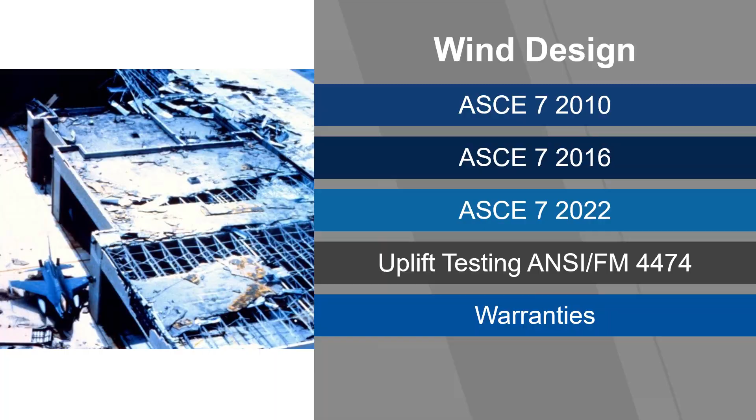Then we're going to take a quick turn and check out the uplift testing to make sure that the assemblies are meeting or exceeding the pressures, and then we'll overlay that with warranties to see how they are dealt with. These are some standard inquiries we get in our office all the time: how does the International Building Code affect warranties, and how do the changes in the ASCE 7 affect roofing installations? Hopefully, through this presentation, you'll have a much better handling of these kinds of problems, and those questions will be answered.

So this is the basic focus that we want to look at: the IBC, which is wind performance, the ASCE 7, which is again wind performance, the FM 4470 and the ANSI FM 4474 testing, which is uplift, and then we're going to look at wind speed warranties, which is wind coverage.

Because again, what we want to do is basically avoid these kinds of problems here, where you've got the membrane just being completely peeled off, or the roof system being damaged.

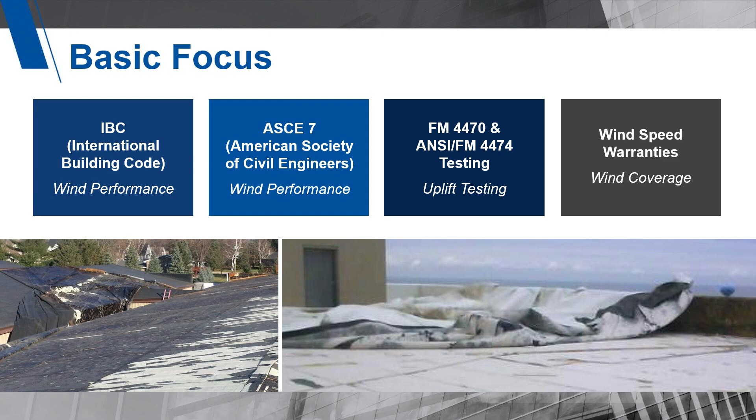Now, the first thing to be able to do the process properly is we need to know which document we're supposed to be using, based upon the state you're in. For instance, South Carolina is using the ASCE 7 edition of 2016, while North Carolina is using the 2010. At this point, no state has adopted the 2022, or is still using the 2005.

But there are 7 states that do it differently. These 7 do it based upon municipalities, local regions, or those kinds of things to decide what code they're using. For instance, in Illinois, they have 3 codes that they actually use: one for the state, one for the schools, and then there's actually the Chicago building code. So each one has their own kind of flavor on how they look at things.

So you need to know exactly what documents you should be using to make sure you come up with the correct pressures. That's one of the first things you need to research. This was actually listed off of the International Code Council website, and it's the latest one that they have for state adoption, January 2023.

Now, within the building code, there's chapter 15, and within chapter 15, they define things like 1504, which references adhered and mechanically fastened systems, and the way we certify those systems is through uplift testing, and then compare that with the pressures of the ASCE 7. I'll get into that in much more detail.

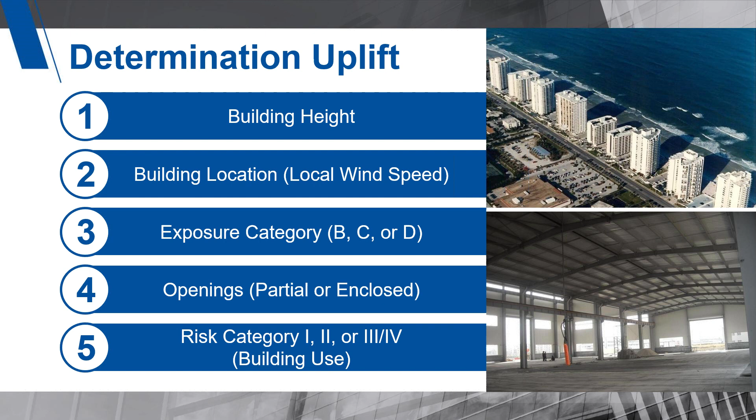And then there's the risk category. This is the step by the ASCE to start to push towards more resiliency in design considerations. So they came up with risk categories 1, 2, 3, and 4. Prior to this, it was just building use importance categories. They've changed that to be more related to what we're dealing with.

Risk categories are defined such that risk category 1 is low risk to human life, examples being an agricultural type building or storage establishment. I like to refer to them as the golf cart shed over on a golf course. It's not a critical structure, so it can be fairly easily replaced and doesn't have a huge category to it.

The most common one we see is risk category 2, used for commercial type buildings. Then risk category 3 and 4 are the ones where we want a good, robust system and design, because those structures store and have kids in them for schools, public buildings, hospitals, power plants. These are buildings we want to make sure can withstand a natural event. They are the infrastructure of our society, so we want to get people to hospitals that are working, so we don't end up having a problem. That's one of the big things people like to focus on, making sure their structures are sound.

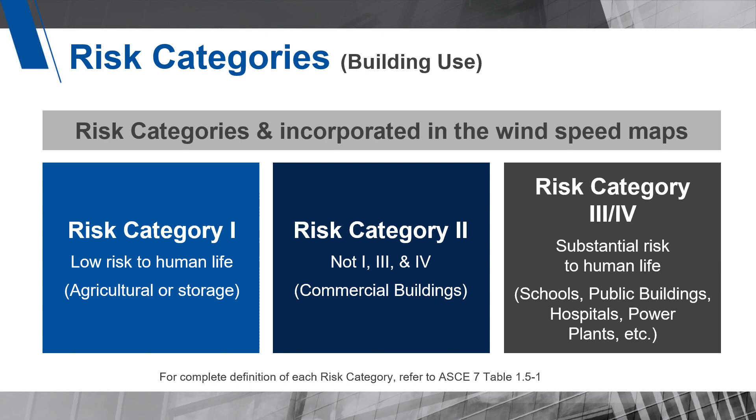Now, in the ASCE 7-10, they introduced new maps from the previous ASCE 7-05. What they did is break them down based upon the risk categories. They revised the calculations to address that. They also redefined exposure D along the coastline areas, and redefined the windborne debris region. These are both incorporated in the IBC 2012 and 2015.

These changes involved exposure D, for instance. Originally in ASCE 7-05, along hurricane coastlines you could treat it as exposure C versus exposure D category. The reason was they felt the waves created by the hurricane or storm coming in were sufficient to create a ground roughness equivalent to an open terrain condition. They did further research and decided to revert that back, so exposure D now has a higher factor associated to it because of the open condition across bodies of water.

Windborne debris region was actually reduced. They found through their studies that as a storm hits the coast, it breaks up much quicker than they anticipated, so they reduced those areas. But those involve special design considerations by the designer, such as making sure you have proper window designs to withstand any kind of flying debris.

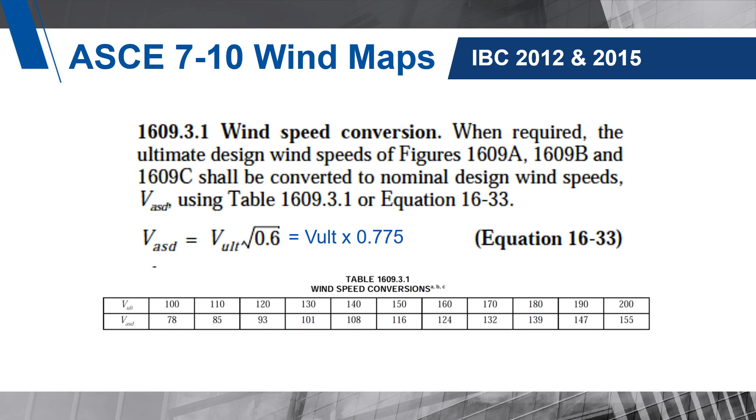This is allowed in the building code in section 1609.3.1, which gives us how to convert the winds from ultimate to allowable. To get VASD, the allowable stress design wind, you take VULT, the ultimate wind, and multiply it by the square root of 0.6, which is actually 0.775. Don't confuse this square root of 0.6 with the 0.6 we use at the end of the math - it's not the same. You can't just take 0.6 and multiply the wind; you have to actually do the square root of 0.6.

This portion isn't in the building code - I added it to make it clearer, since a lot of people are confused about what the square root of 0.6 might be. The code also gives us a chart, table 1609.3.1, where you can convert your wind. So if you're at a 120 mile per hour zone based on the ultimate, you can just look at the chart and see that it's 93 miles an hour, and that's what you'd use in the calculations.

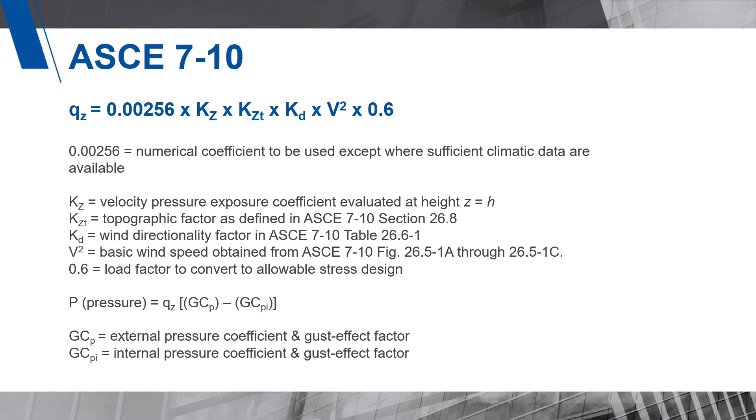While I was in a presentation with the ASCE 7 engineer who was introducing 7-10, a guy in the back stood up and said, '1,700 years? We haven't been collecting weather data for 1,700 years. So how did you come up with that?'

Now, engineers are great people - I've got quite a few friends who are engineers. In fact, an engineer told me this joke about them: they look at life a little differently than the rest of us. If there's a glass half full of water, a pessimist says it's half empty, an optimist says it's half full, and an engineer says the glass is two times too big for the amount of water. So they look at things a little bit differently.

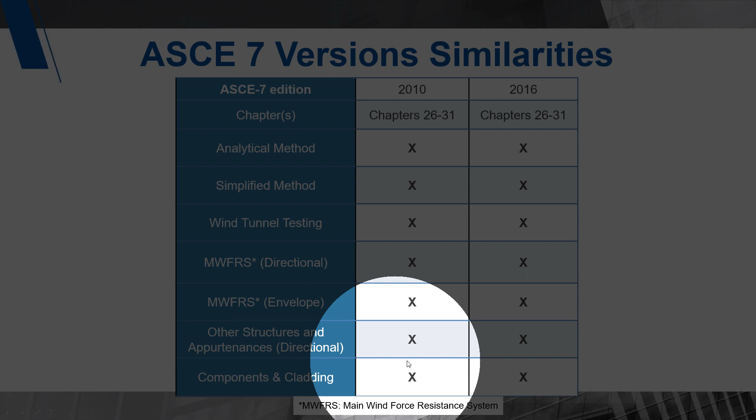The presenter was really happy when this guy asked that question, because the next six slides were a discussion on how they came up with 1,700 years - showing the math, the extrapolations, the charts, the graphs, all these things to come up with the final number of 1,700 years, which was great. The problem was the guy stood up confused and just asked, 'Is this in the building code?' The presenter said yes. The guy said, 'That's all I need to know, thanks.' So now we have 1,700 years.

Now, one thing to note is that the winds themselves are not changing.

The winds listed in ASCE 7-05 are no different than what's listed in 7-10. The difference is the mathematical adjustment of potential occurrence. The winds haven't gotten worse, it's just that they're trying to make buildings more robust to withstand conditions that may never occur. A 1,700 year mean return interval means there's a 1 in 1,700 chance in one year of wind of this amount happening, which is 0.00059. So the chances are fairly low we'll ever see this type of wind, but if we design for it, we won't have a problem with lower winds. At least that's the theory.

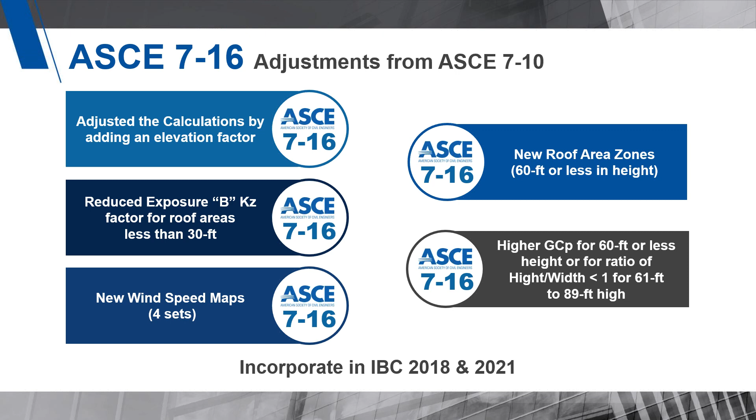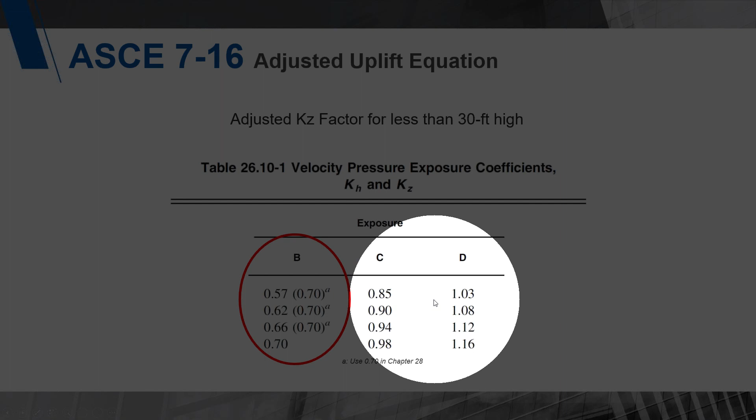Now the 716 introduced a few other things. The nicest part is they kept the same number of chapters and didn't change much. The ones we focus on a lot are the analytical method for calculating, and components and cladding. Those are the two big chapters associated to roofing. The others can be used - there's a simplified method that's a bit more conservative in its approach. The analytical method seems much more accurate for what we're looking for. Components and cladding is where we fall under, to make sure we're installing it correctly.

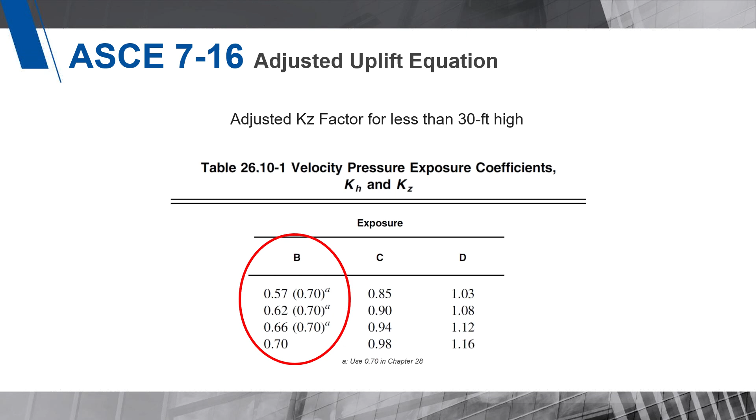The things they adjusted in ASCE 7-16 from 7-10: they changed the calculations by adding an elevation factor, which is sea level elevation - not the elevation of the building, but how high that location is above sea level. I'll explain why they did that. They reduced the exposure B KZ factor, which I'll explain, for buildings 30 feet or less. They added a fourth map set. They broke up risk category 3 and 4, so now there's a map set for each one. And they added new roof zone areas for 60 feet or less building heights, and adjusted the GCp, the external pressure coefficient, also for 60 feet or less.

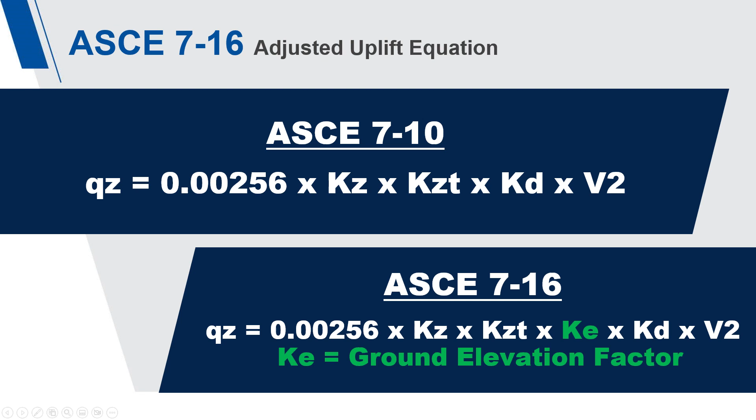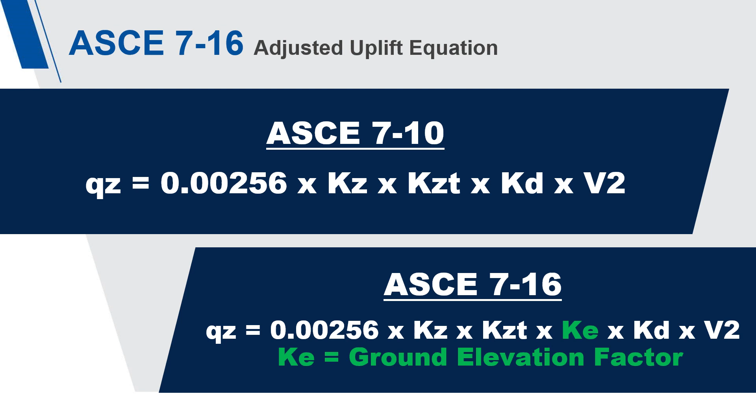Now this is the KZ factor, used in the math, but you need to know the exposure for the building and the building height. This is just a portion of the chart - 30 feet or less - and that's the portion they changed originally in ASCE 7-10 and previous. 30 feet or less for exposure B, urban suburban, was 0.7. Now they've added a gradation to it, and I think the reason is to match up with C and D, which already had gradations included. So it was sort of an editorial change, but you can still use 0.7 if you want, or get a reduction in uplift pressures by going with lower values.

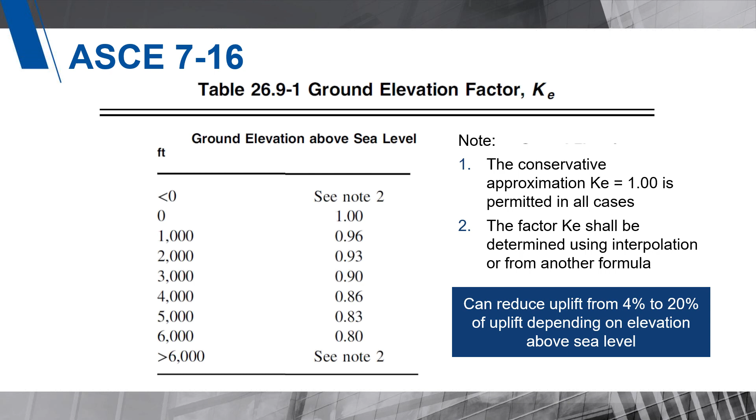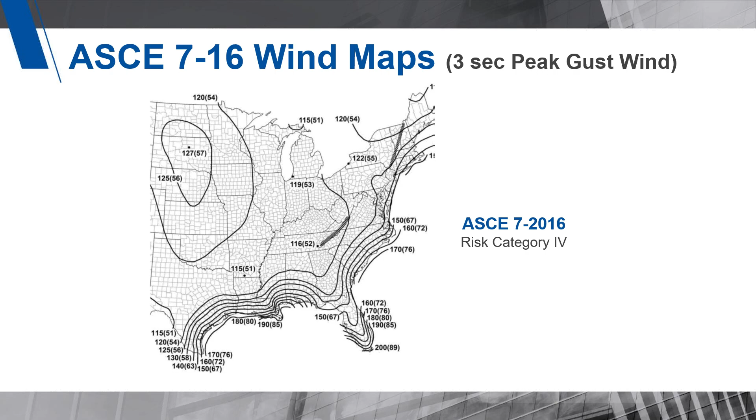The change here for elevation: they added a KE factor, ground elevation factor. The reason is this factor is a constant related to air pressure and air density, and as we go higher up, air density gets less. I recently watched the SpaceX launch, and it was mentioned that resistance for the rocket gets easier as it gets higher. So it's usually the ground area we deal with the most that we have to force things through, and that's why air density is much higher at lower elevation. That factor is associated to sea level. So they want to adjust it, because if you're in Denver, you get lower air density - you have trouble breathing because you're not used to it. Athletic people go up there and work harder, get their lungs stronger, so when they come down to higher density air, they supposedly have better physical strength than people who don't train in those areas.

This is the factor associated to that, and depending on where your ground elevation is for the building, you would get that reduction. There could be a reduction between 4% to 20%, but it doesn't start until you're at a sea level elevation of 1,000 feet or higher.

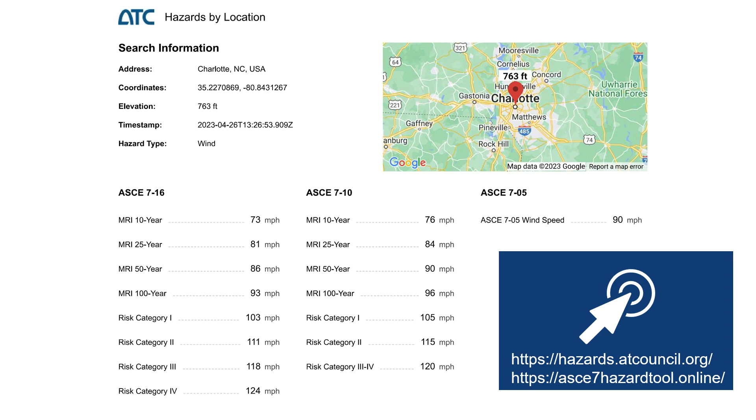And this is the new wind maps. So 716 has a 3,000 year mean return interval map for risk category 4. With a 3,000 year mean return interval, that means there's a 1 in 3,000 chance in 1 year, which comes out to 0.00033. So it's getting harder and harder to see these winds actually happen, but that's what we do for the calculations to make sure we're reducing the risk.

They did change the map, which made it a little bit more difficult to determine exactly what wind you may be using. But luckily, there are websites that you can use to help narrow and get better ideas on what your wind might be. Those two sites are hazards.atcouncil.org and asce7hazardtool.online.

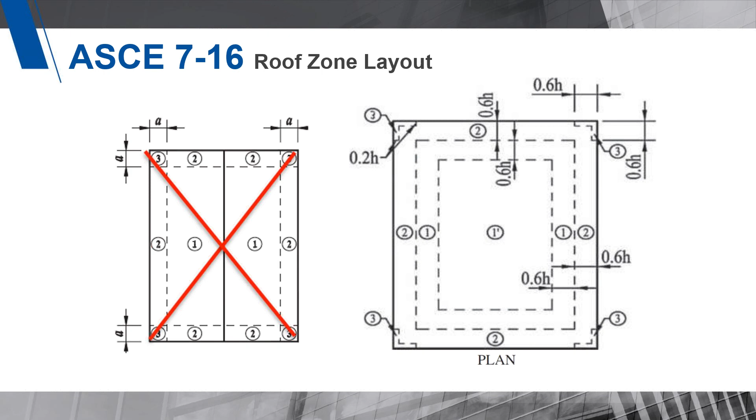This is an example of the ATC site, and the nice thing about it is it gives you everything that you typically need for the 705, the 710, the 716. It also gives you the elevation. So we don't go over 1,000 feet here, so we don't use an adjustment on the elevation factor, and you get all the risk categories.

Now they do have these other mean return intervals on the chart. Those are actually used by engineers for different things. We, the roofing industry, basically look at the risk categories and these specific winds in the calculations. So we don't use the others, and these are all ultimate winds, by the way.

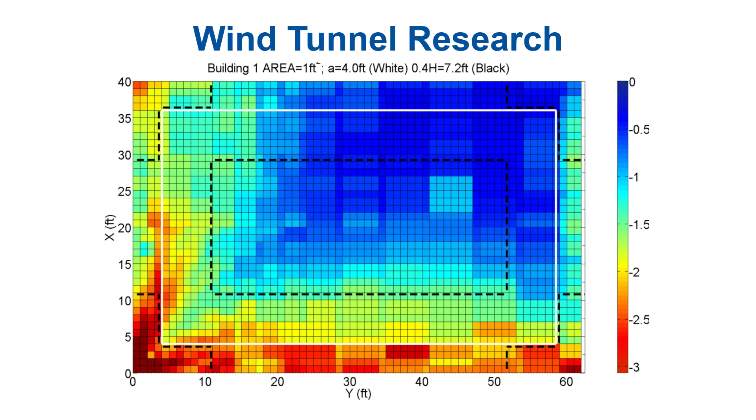Now, the roof zones layout that we were so happy with, up till the 710, was these 3 zones: zone 1, 2, and 3. Well, when you shift over to the 716, those are no longer used. What we use is this zonal map with zone 1 prime, zone 1, zone 2, and zone 3. Yes, they have 4 zones now, and zone 1 prime is a mathematical term. That is not a zone 1 foot, just to let you know. I've had people actually ask that question. So that's what we're going to be using for 716 and on.

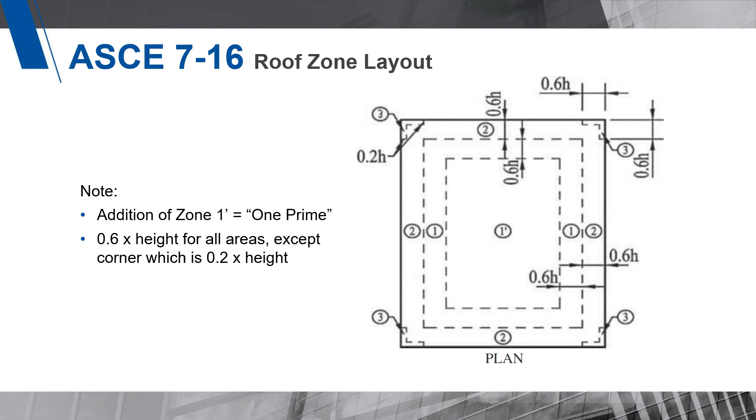The way they came up with this is they went back to the original test they did in the 80s, which was a wind tunnel study on buildings and how wind basically moved and pressures were created. They had all these pressure taps. Well, they did the same study, but added a significant amount more pressure taps to get a finer detail of what was actually happening up there with the negative pressures, and to get it mapped out properly. This is an example of that study, and you have to imagine the wind is being blown across here. So these are going to be the highest pressures, and then as it goes across, the pressures lighten up. And in this study, they found out that the corner is actually an L, and that's why they now have that L design in the configurations.

And then we have our zone 2, which is the next higher pressure, and then they have zone 1. But then they found out that it really lightened up in the center area, and that's where they found out there was actually a zone 4, or zone 1 prime as they referred to it. And so that's why we have this kind of map now associated with it.

And just to let you know, even though we have this L here, a lot of designers, consultants, and applicators simply just square that off. All the guys have been taught how to do the square for zone 3. So trying to figure out the L can be a little bit difficult and daunting. If it's a huge building, yes, they'll probably do it. But for standardized buildings, they probably just go ahead and square it off to make it easy for them.

But this is what we use now: 0.6 times the height of the building, and the corner leg widths are 0.2 times the height. The old formula of 0.4 times the height of the building, or 0.1 times the shortest width, is no longer used in the 716 and beyond. So keep that in mind that it changes with the change of the document.

This is the GCp pressures. I normally don't discuss this very much because it hasn't changed until the 716. It was always the same coefficients that they used, and these were 1, 1.8, and 2.8. But when the 716 was introduced, they changed that.

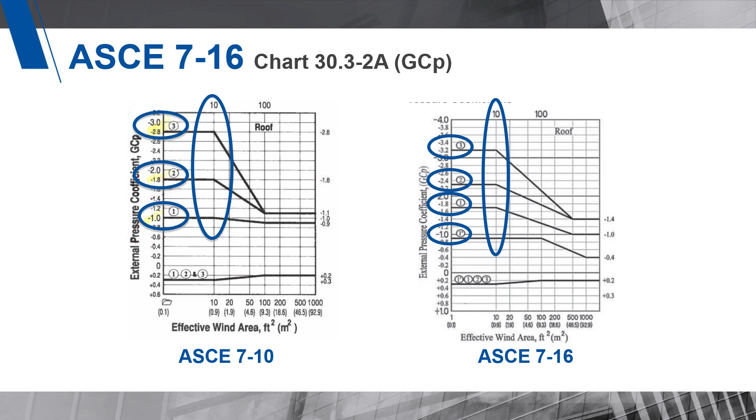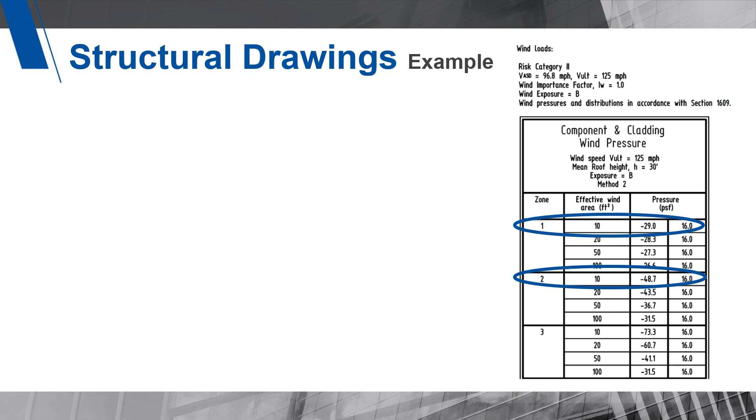This is the chart that they have in the ASCE 7-10, and this is the same chart from the ASCE 716. And when you're looking at these areas, you're trying to figure out what coefficients we need to use associated with these roof areas.

You may have seen on structural drawings effective wind areas of 10, 20, 50, 100, and so on. And people have always asked, which one are we supposed to be using associated with roofing? Well, that's actually the 10 square feet effective area.

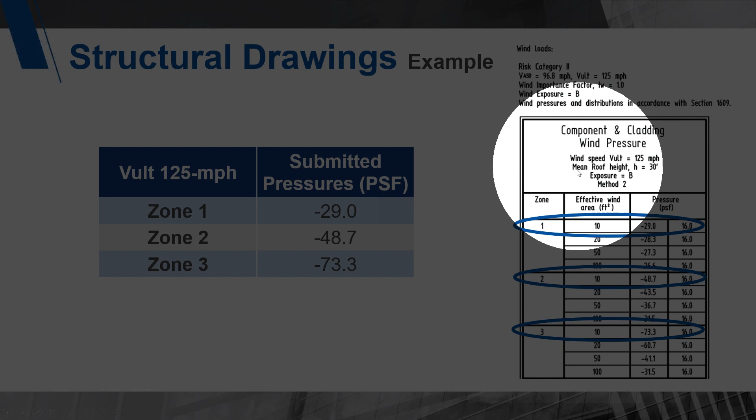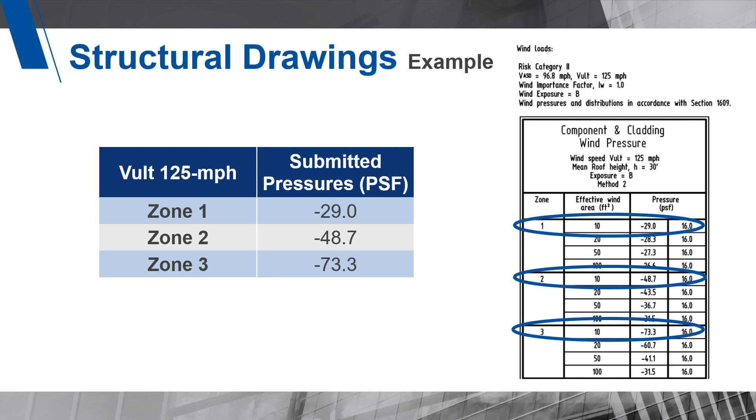This was actually discussed in some industry organizations, and they came back and said 10 square feet is for roofing, so that's what we always focus on. As we look at these lines come across, when they hit the 10, that's when we scoot over and we'd be able to use those coefficients. For instance, if you look at 50, you'd have different coefficients, that's why you end up with different pressures associated to those areas.

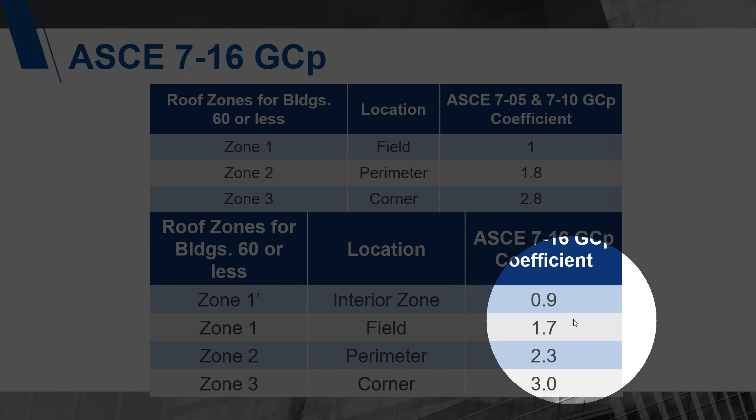So this is where we get our 1, 1.8, and 2.8 from the ASCE 7-10. Well, we do the same thing in the 7-16. It's 10 square feet effective area, and we have basically 0.9, 1.7, 2.3, and 3.0.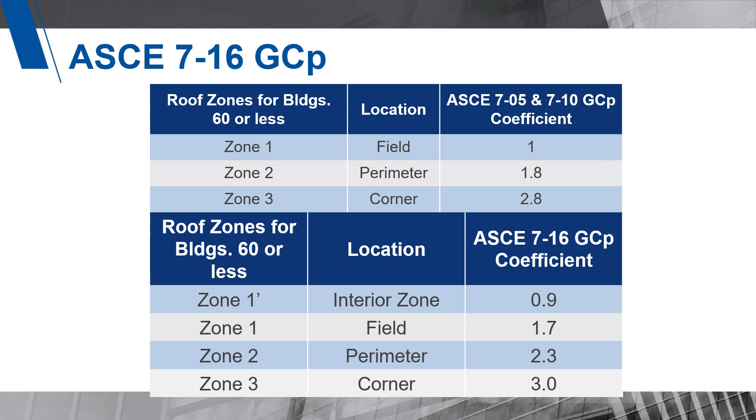So these are actually ultimate pressures, these are not allowable pressures. The minimum that would be required is actually multiplying that by 0.6, and those are the pressures that we would then try to make sure that we meet or exceed.

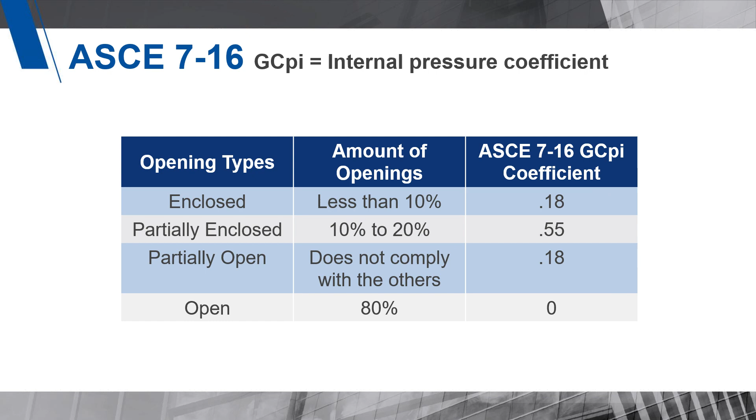This is the zonal, the coefficients again. And the reason I'm showing you both of them is that zone 1 was a 1, and now zone 1 is a 1.7 - that's a 70% increase in uplift pressure. So it's a significant change from what was done previously within the documents, and it's going to make much higher pressures.

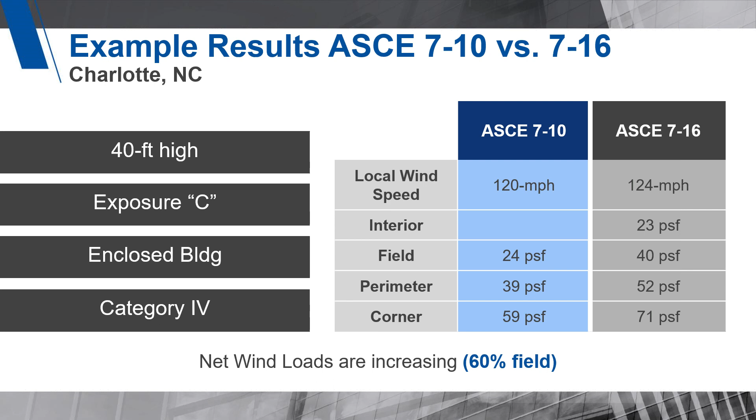They also introduced changing the GCPI, which is the internal pressure coefficient. It used to be just enclosed, partially enclosed, and open. Now they have a partially open definition. And the interesting thing about it is that you can see enclosed is 0.18, partially enclosed is 0.55, and when you get to partially open, it ends up being back down to 0.18. I believe the thought there is that if there's enough significant openings, as the wind blows in, it blows out the same way, but it does have a minimal amount of internal pressure that's created.

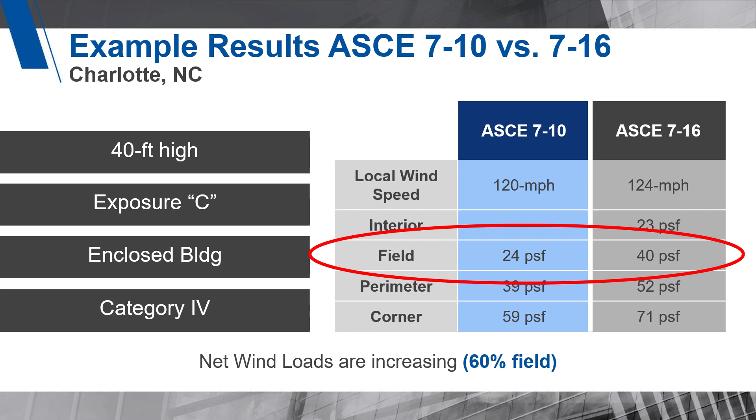I sort of debate that with people, because I've dealt with airplane hangars and other large buildings with large openings, and there seems to not be a proper factor to be used. So I'd be conservative in my opinion and just stay with the 0.55.

Now this is a comparison between the 710 and the 716. Building height 40 feet, exposure C, enclosed, and a risk category 4. As you can see here for the 710, 120 miles an hour, ASCE 716 to 124. And so the uplift pressures for the field, for instance, is 24 pounds per square foot versus 40 pounds per square foot. Perimeter is 39 pounds per square foot versus 52 pounds per square foot, and the corner is 59 versus 71.

For the wind in the field, that is a 60% increase in uplift pressure associated to it. So that can be changing the design considerably, creating a more robust system that may be required to be installed. So just keep that in mind when you're doing these documents, making sure that you're using the proper one for the proper area.

Now this is the ASCE 722. This one has been adopted into the next version of the building code, which is coming out next year, the 2024. I've actually seen one person use these calculations already in their specifications, so you can actually start using them if you want. But there are some different changes associated to that you got to keep in mind. These documents are living, so they're constantly changing and modifying them. They've adjusted the calculations again.

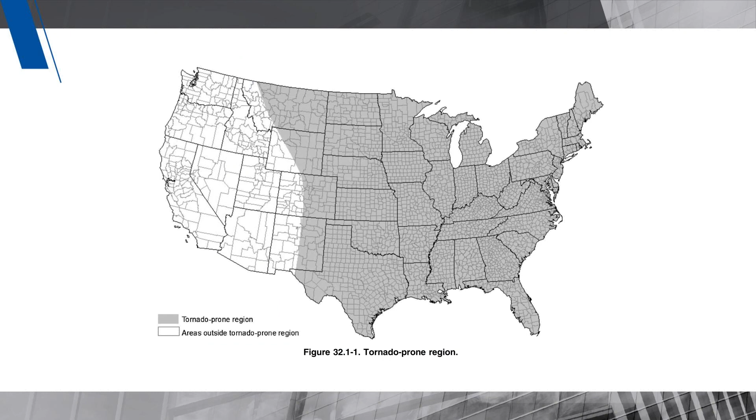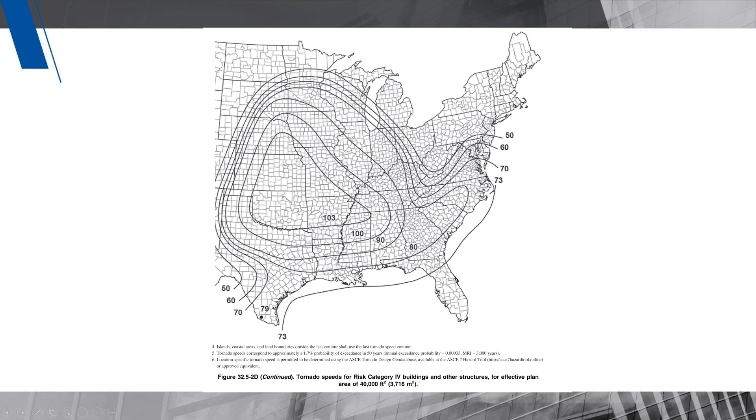There's a factor within the calculations called wind directionality. This is to basically allow for the fact that wind is constantly moving, not always a straight line condition - it's always fluctuating backwards and forwards and up and down. That factor moved from the main calculations, the velocity pressure result, down into the zonal area calculations. The reason they did that is so their calculations associated to tornadoes would work properly. So now they have a tornado uplift chapter, tornado maps associated to that chapter, and calculations associated to it also. One thing they did adjust, and I've heard good compliments, though I don't do a lot of steep slopes, is that they changed the roof zones associated to steep slopes, so it should be a little easier for someone to work with.

With tornadoes, the important thing is first to determine, are you in a tornado region of concern? This is the tornado prone regions, and you can see that a good two-thirds of the United States needs to consider tornado calculations potentially, depending upon a flow chart, which I'll go through in a moment.

This is the winds associated to the tornadoes that we would use in the calculations to determine uplift loads. The other thing is it's limited to risk category 3 or 4 buildings. So if you're dealing with a category 2 type structure, you don't need to do tornado calculations - it's only for risk category 3, 4 type buildings. And calculations are only up to EF2, so you have EF0, EF1, and EF2 type results that you need to look at.

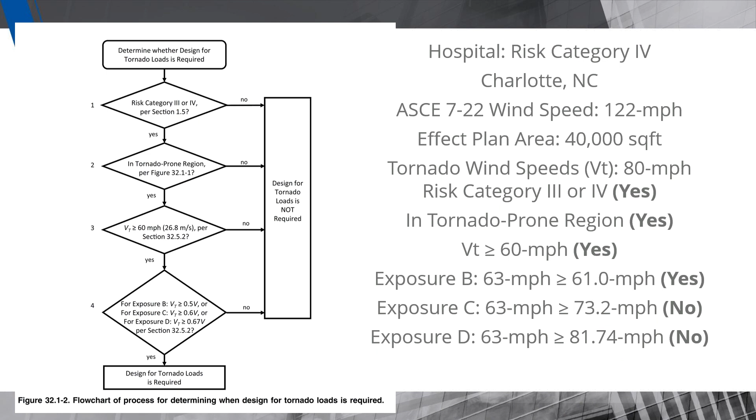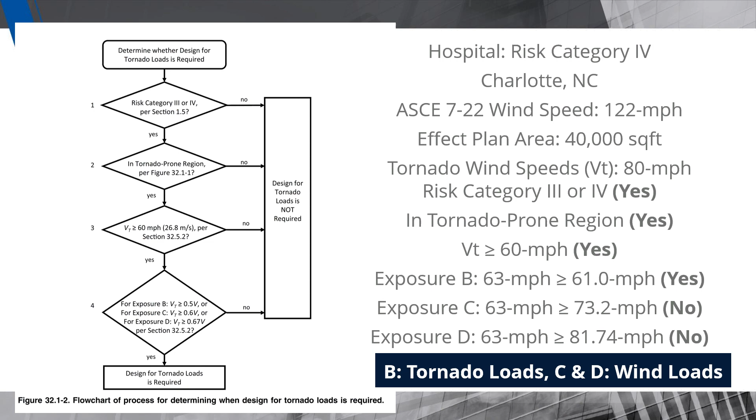Now, this is the flow chart to determine if you do wind load calculations or tornado load calculations. You go through this flow chart, it's got all these yeses and nos to it, and then you're able to make a final decision on which one you should use.

For instance, this is a hospital in Charlotte, North Carolina. The ASCE 7-22 says the wind speeds there are 122 miles an hour. The effective plan area I picked is 40,000 square feet. The tornado winds based upon the maps are 80 miles per hour. It's a risk category 3 or 4 building - yes. In a tornado prone region - yes. Is the VT, which is the 80 miles an hour, greater than 60? Yes. So far you're looking like you're going to have to do tornado loads.

But now you could look at the exposure categories and it adjusts. Exposure B - yes. So if you're doing an urban design in an urban or suburban area, following the ASCE 7-22, you go to the tornado load calculations, not your standard wind load calculations. But for exposure C or D, you still use the wind load calculations. So that's how it breaks down for how you would use which calculations for the area you may be dealing with.

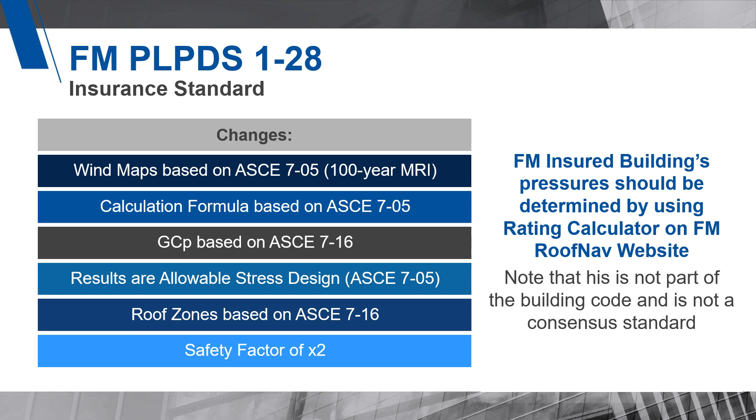Of course, if you want to go to extreme, they actually have maps in there that go as far as a 10 million year mean return incident. That's a significant amount of years to start with, but it also gives you some significantly high winds in their adjustment. By the way, a 10 million year mean return means there's a 0.0000001 chance of seeing that wind in one year. So it's a very rare event, and you may actually see that. At the same time, to build that structure probably would be very expensive. So that's the other thing - you can go overboard on engineering, so be careful.

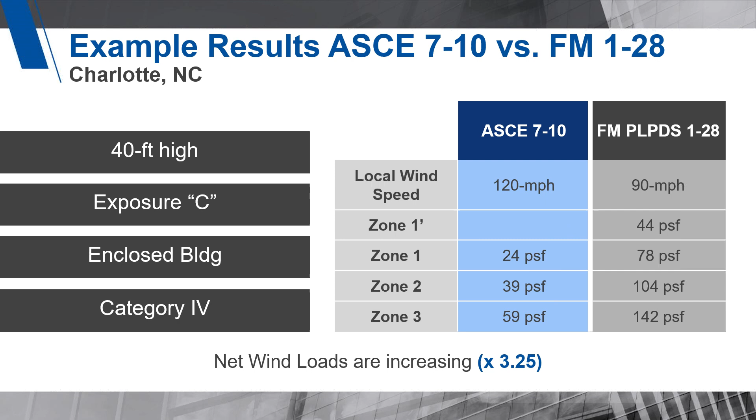Now, one of the other things that has caused a bit of confusion out in the industry - this is not required by code, but if your building is insured by FM, they want you to follow this kind of stuff. This is their adjustment, or their version, of the ASCE 7. What they've done is combine two of them together: they're using the ASCE 7-05 and the 7-16. They use the calculations of the 7-05, which is a 100 year mean return incident - you use those maps to get the winds. The calculations are based upon the old ASCE 7-05 version, but instead of using the GCPs of the 05, they're using the GCPs of the 7-16, which then makes them use the 7-16 zones, because you now have a zone 1 prime.

The results of the calculations come out to 7-05 for allowable stress, and then they apply a safety factor of 2, as always. Keep in mind this is not a consensus standard, and it can get a little complicated.

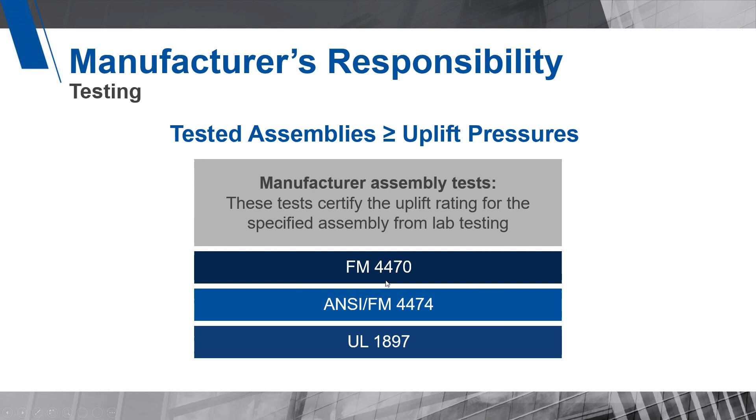I would suggest, if you want to follow FM in this respect, use the RoofNav website calculator to determine the exact pressures. You're going to find out that they're significantly different than the 710 or the 716.

This is a comparison between the 710 and FM 1-28, where you have the same configuration we just talked about, but you can see the pressures they're showing are significantly higher than you'd see for minimum building code criteria. You can use these, and if it's FM insured, you have to use them. Just keep in mind that can be a very expensive installation and costly to the building owner. In this example, the wind loads are 3.25 times higher than the building code.

Now we have the pressures. How do we get the final testing? Well, we follow the FM 4470, the ANSI FM 4474, or the UL 1897.

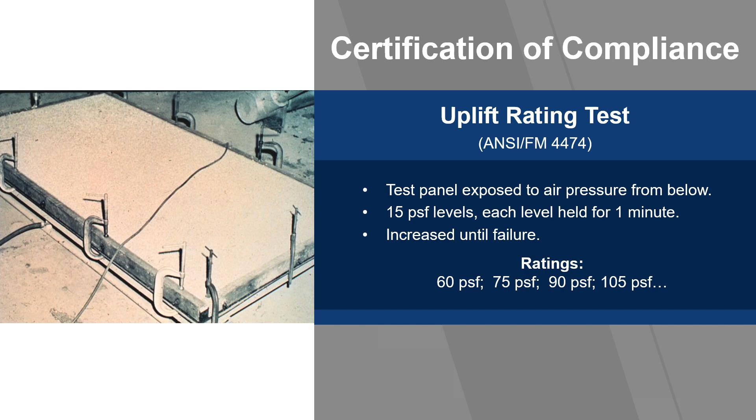Not a lot of people test associated to this test. It ends up being pretty much close to the same results we get out of these two tests, and these two tests we've been using for decades. So most of the data from manufacturers is actually focused on this. You can list all three in your specification if you want, but just make sure you don't limit yourself and your designs by just going with the UL 1897.

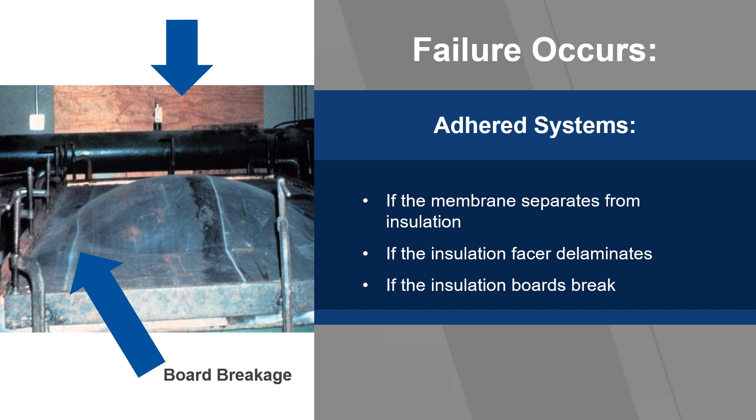The 4474 is actually a test associated that's listed within the FM 4470, but the 4470 is a group of tests, which includes the Kesternich test for fasteners, hail tests, and a whole bunch of other things that really some are not required by the building code. So if you're just looking at uplift, this is probably the most important one to make sure you have listed within your specifications.

The test is done by having the manufacturers come in, build a sample, and pump positive pressure from underneath it to simulate the negative pressure of wind being blown across. We start at 30 pounds per square foot, hold it for a minute, add 15 pounds per square foot, hold it for a minute, and continue that cycle until it fails.

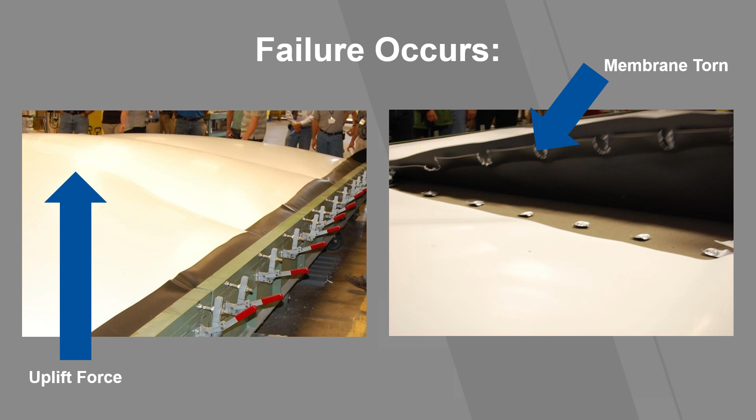Keep in mind that a Factory Mutual 1-90 is actually 90 pounds per square foot, not 90 miles an hour. Also note that all the increments are in 15 pounds, so you will not see an uplift design rated at, say, 99 pounds per square foot. There's no rating for that. You'd go up to the next level, which is 105. So it's always going to be in 15 pound per square foot increments.

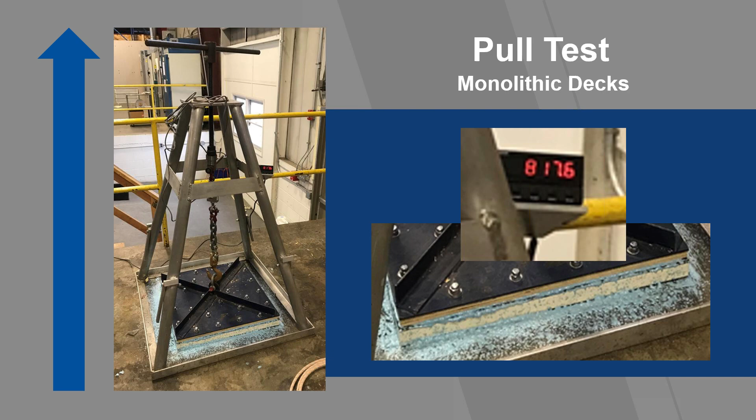The failure mode they're looking for in adhered systems is the insulation: the membrane separates from the insulation, the insulation facer delaminates, or the insulation board breaks. In the example here, the board broke at this location between the fasteners, and then it started to allow air to build into the system and cause it to peel upward.

This is a mechanically fastened system. The failure modes they're looking for here are if the fastener pulls out of the deck or if the membrane ruptures. It really doesn't rupture though - what happens is that as air builds up underneath it, the plates typically bend or break, and then it tears through the membrane from underneath where the seam's located, turning into this big bubble on the table. One fastener fails, it overloads the others, and it just sort of zips across the table. That's how it fails typically.

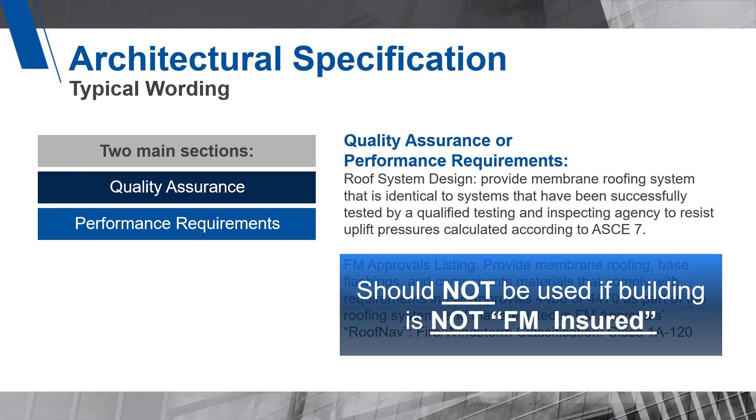That's how we get an idea of what we need to do to increase fastening densities or increase the thickness of the membrane, or whatever we're planning to do to get higher uplift pressures. Now those tables are only calibrated to about 300 pounds per square foot. To get anything higher, we have to adhere it down with some kind of adhesive.

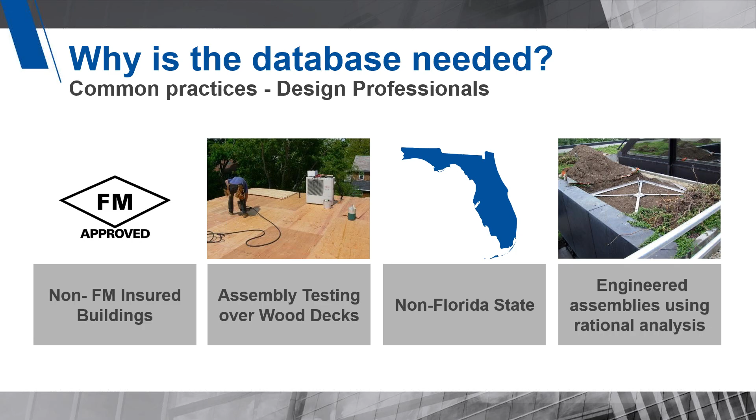We use this monolithic pull test where we have this big chain, cranker, and a meter. What we do is adhere the insulation to the deck, then adhere the board to it with the metal plate, and then we start pulling. This one got up to 817.6 pounds per square foot.

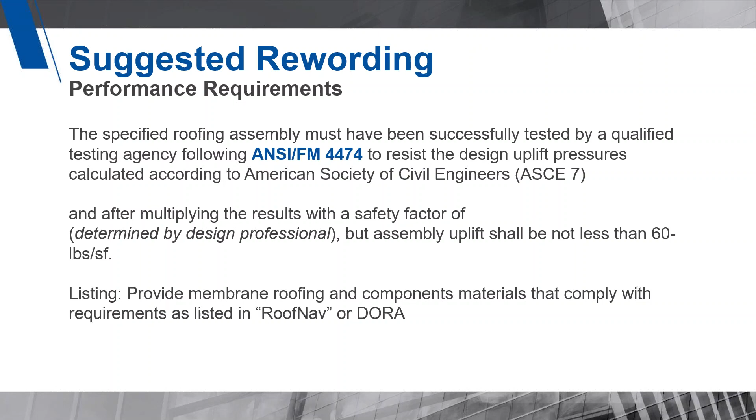In architectural specifications, you might see this wording. I believe Master Spec has this, where it could be either in quality assurance or performance, but basically you're asking for the system to be designed and tested to the uplift pressures of ASCE 7. But then there's also this little block about FM approved listings. Keep in mind you should not have that in there. If the building is not FM insured, it's just going to cost more for that installation, unless that's already decided by the building owner as acceptable.

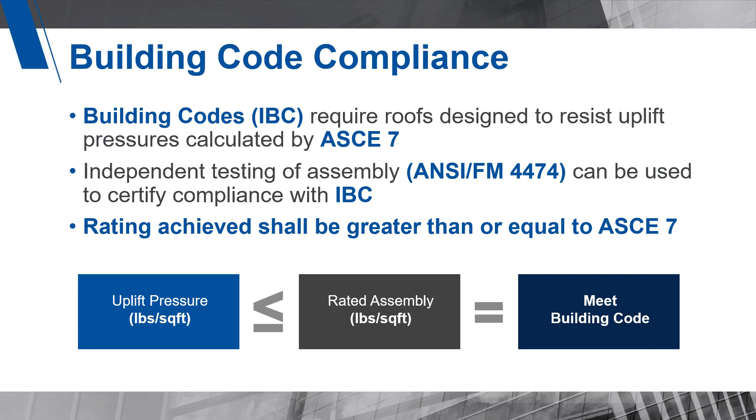So keep in mind that can be misleading and add additional costs if the building is not FM insured. Another place you can get listings of membranes and systems is DORA, the Directory of Roof Assemblies. This website has the roofing assemblies typically used in the industry, but it also offers wood deck ratings associated to their attachment, be it adhesive or fasteners. So it can be used. It also offers engineered assemblies using rational analysis. The goal is to make this site a one-stop shop for Chapter 15, eventually including the exterior fire test, interior fire, and foot traffic test associated to impact resistance of roof systems.

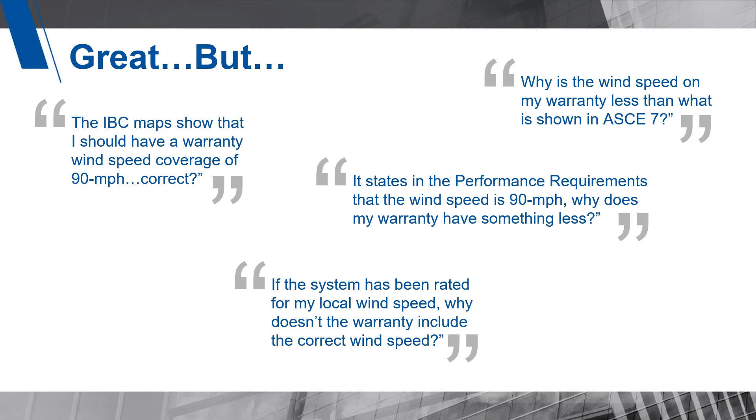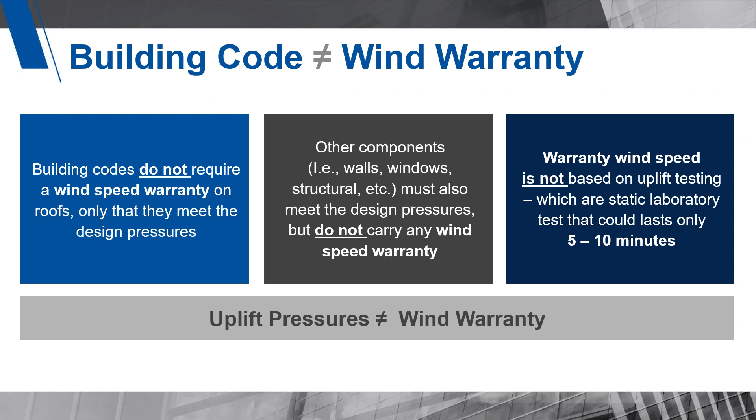This is suggested wording you may want to consider, where you're basically making sure you test the assembly and it exceeds the pressures. If you want a safety factor, you can, but not less than 60 pounds per square foot. Then just ask for a number showing it has been listed within RoofNav or DORA. And that's basically the process: we calculate the uplift pressures, make sure the rated system is rated equal or higher than that, and you've met the building code. Very simple.

But if the IBC maps show that I should have a warranty wind coverage of 90 miles per hour, correct? Why is the wind on my warranty less than what is shown on ASCE 7? It states in the performance requirements that the wind speed is 90 miles an hour. Why does my warranty have something less? If the system has been rated for my local wind speed, why doesn't the warranty include the correct wind speed?

Well, the first thing to realize is that the building code does not equal any warranties, let alone wind warranties. Building codes do not require a warranty for roof systems or the building itself. You can take the word warranty or guarantee and put it through the IBC, you will not get one hit. So you're not required to get a warranty from a manufacturer. It's just something nice that we offer people. Other components such as walls, windows, and structures all have to meet these pressures. The engineers have got to do them, but they don't carry any kind of wind speed warranty.

And warranty wind speeds are not based upon uplift testing. That's a static laboratory test that lasts only 5 to 10 minutes. We use our warranty claim data to actually determine how we want to improve the system to be able to qualify for wind warranty. So uplift pressures do not equal wind warranty. Keep that in mind.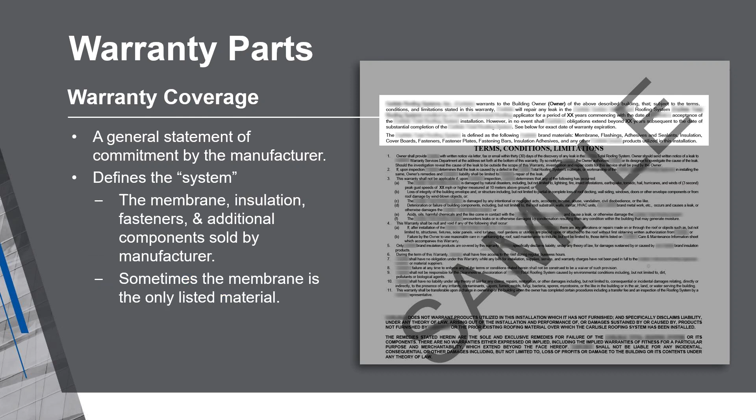So if the ASCE 7 is a hot dog, what are warranties? Well, I like to say the building code is basically hamburger, and going beyond the building code is steak. But when you get to warranties, you're basically looking at the dessert, a donut. It's nice and sweet, gives you a good feeling in the beginning, and then gives you a little letdown at the end. So keep in mind there is no relationship between warranties and the building code. They're completely separate food groups and don't have any kind of relationship to each other.

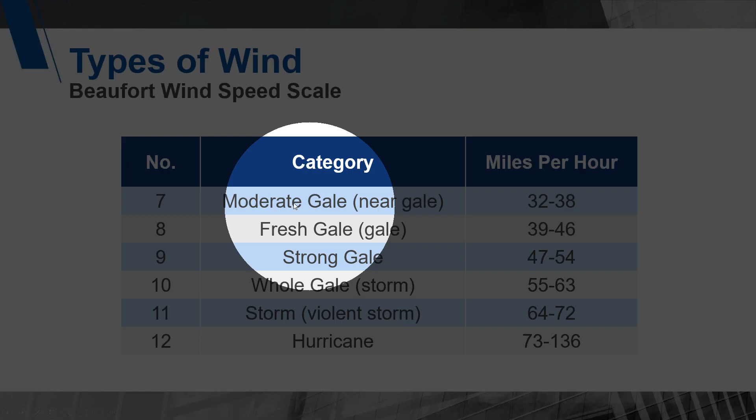Last few minutes, let's talk about warranty words. The first thing is you've got to understand how warranties are viewed by a manufacturer, versus how customers look at them, as a statement of responsibility by the manufacturer and an indicator of relative life expectancy of the roof system. In truth, most warranties are used as tools to market products and limit competition. They are marketing tools to help sell products only. If you want to take a moment and actually read one, which I suggest strongly, they're basically broken into two components. The first top area usually defines the system, which can be what is being warranted, such as the membrane, insulation, fasteners, additional components sold by the manufacturer, and labor.

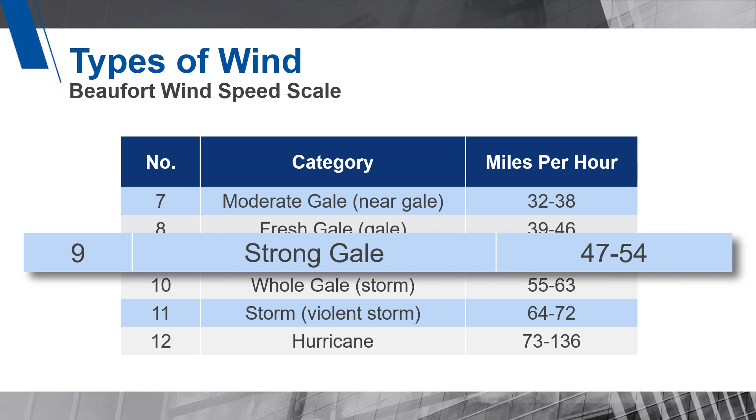Sometimes you'll just see in some warranties just the membrane being listed. It's a 20-year system warranty, and they define the system as the membrane and nothing else. So keep in mind that's just a glorified material warranty, so they can play with the verbiage a lot within these things.

The other section is the much more interesting one. That's where you run into the detailed assistance of the membrane manufacturer, paying for repairs, maintenance and periodic manufacturer's inspections, and the type of wind and miles per hour for the wind coverage. So let's take a few minutes and look at the coverage versus coverage associated to winds and see how they're not anywhere near the same.

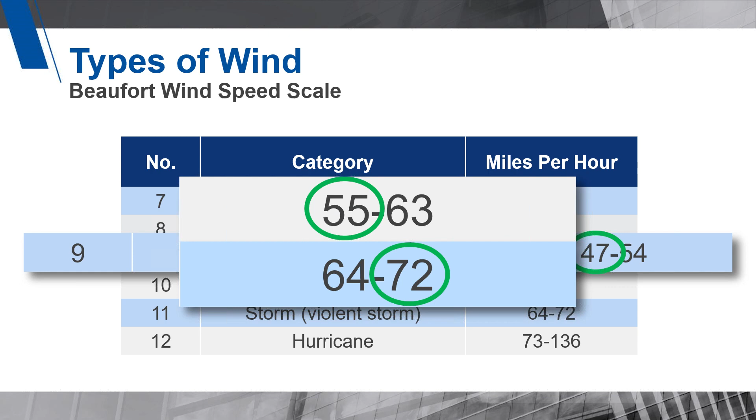When I first started in the business, the company I was working for basically said they were offering full gale force wind coverage associated to their roof assemblies. And I thought, well, that's pretty good. I said, where did you get that term from? And they said, oh, I got it from the Beaufort scale. And I looked at the Beaufort scale and it said, well, it's got moderate gale, fresh gale, strong gale, whole gale, no full gale force winds.

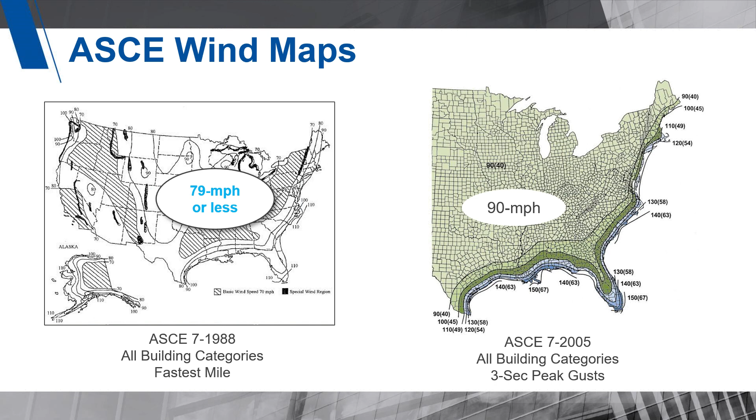So what are you actually using? And they said, well, we're actually using strong gale, but we're using 47 miles an hour, which was their limitation at that time. So that's what everybody was actually pushing for. In fact, some manufacturers are still listing full gale force winds.

But down the road we went and we said, hey, we've got better systems, better designs, we've got a lot more experience on our belt. What we're going to do is actually add higher wind speeds, and we're going to publish them this time, right on the warranty. So they went to whole gale storm and 55 miles an hour. That was when we started actually showing miles per hour on the warranty.

And then we went down the road a little more, and they said, well, we can actually offer an even higher wind speed. What we're going to do is storm, and we're going to do 72 miles an hour. So if you've ever wondered where those numbers came from, 55 and 72, it came from the Beaufort scale map. And it was no science, no research. It was just a bunch of guys sitting in a conference room making decisions about a number that they wanted to put on a warranty.

Well, back in '88, that was no big deal because those wind speed maps were basically 79 miles an hour. So 72 is close enough for that. Well, as you know, we now have 90 mile an hour maps. We have 120, and we have all sorts all across the map.

These are not used for warranties. These wind speeds are used in determining uplift pressure so we can meet the building code. These are the building code criteria. This is not warranty criteria.

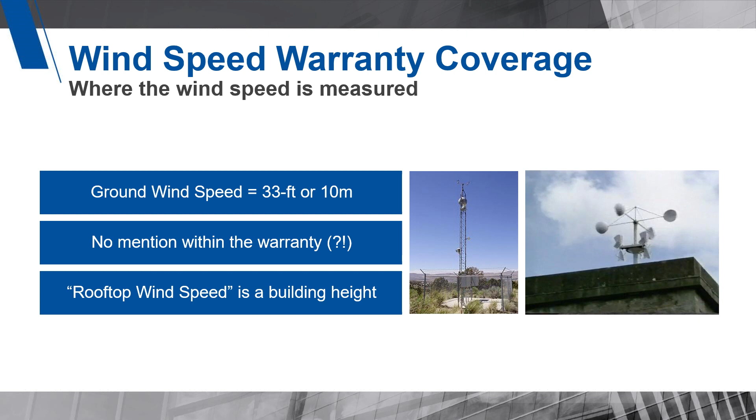The other thing is that wind speed warranties are looking at empirical data of actual winds, while these winds that we're looking at versus maps are mathematical assumptions based upon a term mean recurrence interval. So it's a mathematical assumption. It's not real world kind of data that we're looking at. We're looking at what our chances are of having this type of wind. So keep in mind that we don't warranty chances. We warranty the actual empirical wind results.

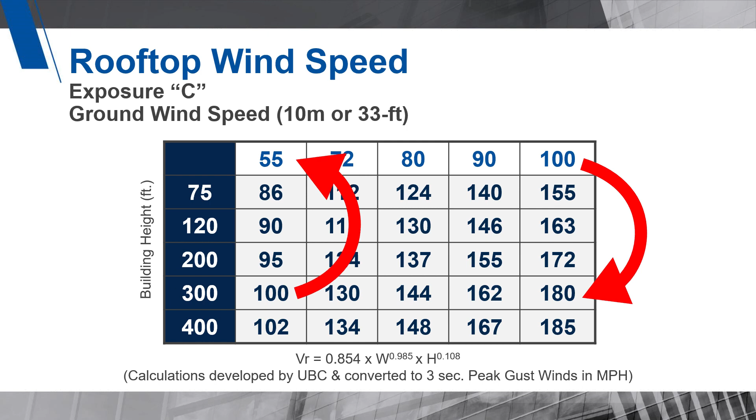How is it mentioned on the warranties? No wind speed is covered sometimes. They still reference windstorms, full gale force winds, gale force sometimes is used, and this one manufacturer actually uses 'gales excluded,' which then defaults down to 31 miles an hour.

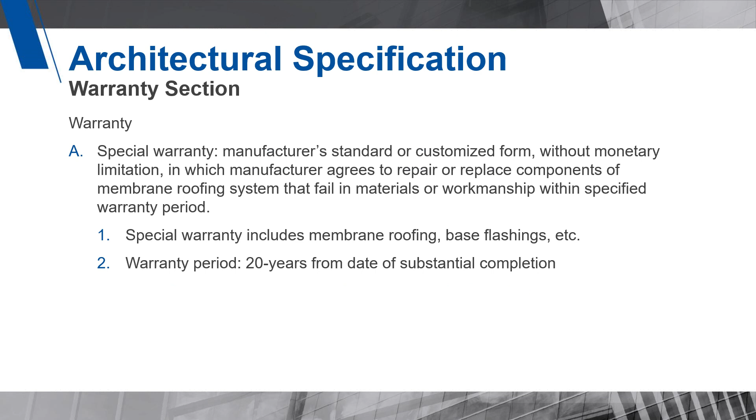Others use terms like limited wind speed coverage, which I've never gotten a definition for, capped at 38 miles an hour. Talked to my lawyer about that. He gave me the impression that anytime the wind exceeded 38 miles an hour, that warranty could be voided even if no damage happened. The wind speed coverage was prorated.

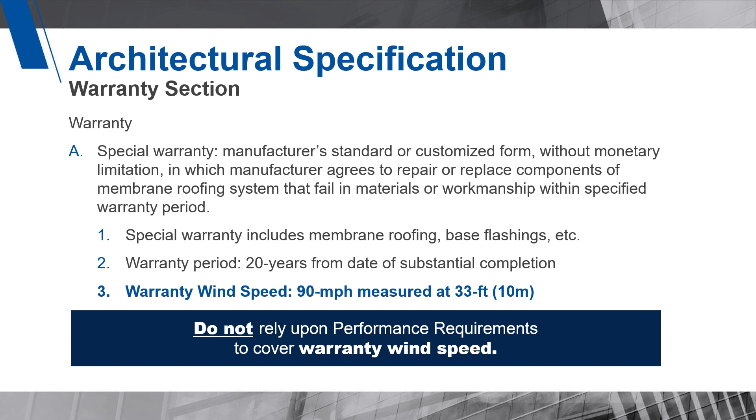It was a 10-year, 100 mile per hour warranty. They prorated the wind, so at year 8, they only had 20 mile per hour coverage. And then, of course, you see all the numbers that we print on warranties.

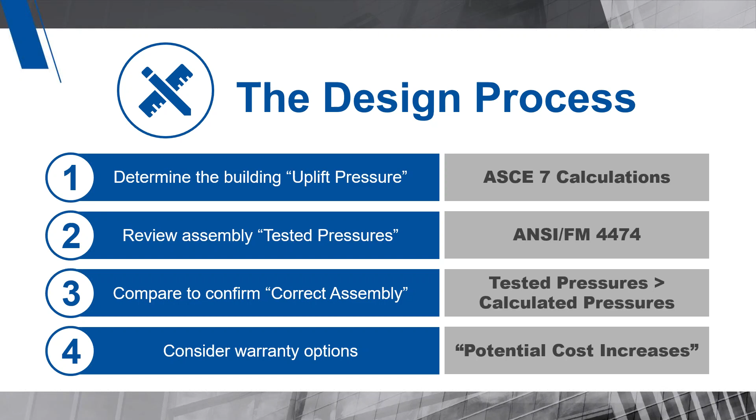Also, where the wind is actually registered at—ground wind speed is typically registered at 33 feet, 10 meters. That's typically what we like to use. There's no mention within the warranty, which allows the manufacturer to pick where that wind is measured, and sometimes you'll see it referenced as rooftop wind speed.

Where that becomes a factor is if you're dealing with a high roof—say the building owner has a 300-foot high building and wants a 100 mile per hour warranty. If he gets to the rooftop, it's going to be 55 miles per hour at ground. If you take 100 mile per hour at ground wind speed, it's actually 180 mile per hour at rooftop. So you get a little more coverage with ground wind speed warranties than you would otherwise. This is solely if you're dealing with high-rise buildings.

Don't rely upon the performance. So these last couple slides: have the building owner read the fine print, request warranty samples, really study the duration versus the coverage. I've seen shorter warranties sometimes offer better coverage, and get clarification in writing.

So that's basically the design process: calculate the pressures, test the system to meet or exceed those pressures, and then overlay that with the potential cost increases associated to the warranties. There are significant costs that can be found by just looking for a warranty.